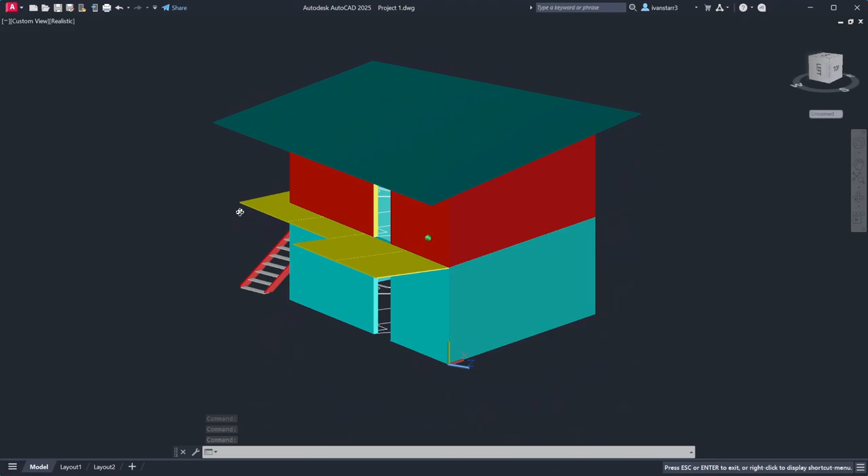Now this building here is one I modeled for a friend. He's got a hotel, and this is a new building. This is the shell of it. It's got non-trivial architecture because it's going to go into a cramped little space he's got on his property. It's going to turn out really nice. It's basically already at this stage.

But for right now, I'm going to show you this program that's going to automate the drawing of windows, and I call it Architectural Windows. This is the 18th version.

As you can see, it is not a trivial program. This isn't all of it, this is the main bit. It references a lot of functions in my support functions file - more on that later. It's a program that uses dictionaries and 3D programming, using matrices and vectors, to do what I'm about to show you.

Let's get back to it - first you got to load this. You should always load your program before you try to use it. So that just loaded it right there. Control Alt E, that's how you load it very easily. You could go up here to Debug, or Project, there's a load command somewhere, but it doesn't matter - you press Control Alt E to load it.

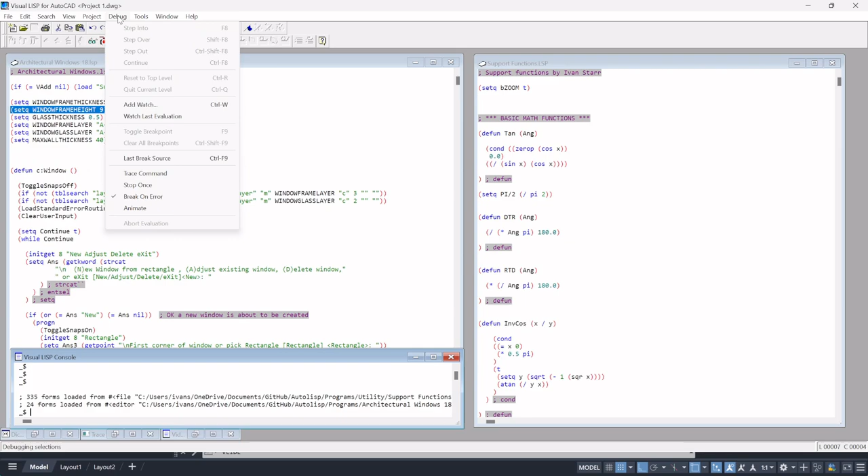We'll go back to AutoCAD - you can do that by typing Alt W A as a shortcut. And here we are in AutoCAD. I think the best way to use this program is to draw some rectangles on these 3D solids where you want the windows, and those rectangles are just going to turn into windows semi-miraculously.

So let's go around. I got my dynamic UCS button on, and that's going to allow me to draw on the faces of these 3D solids representing walls.

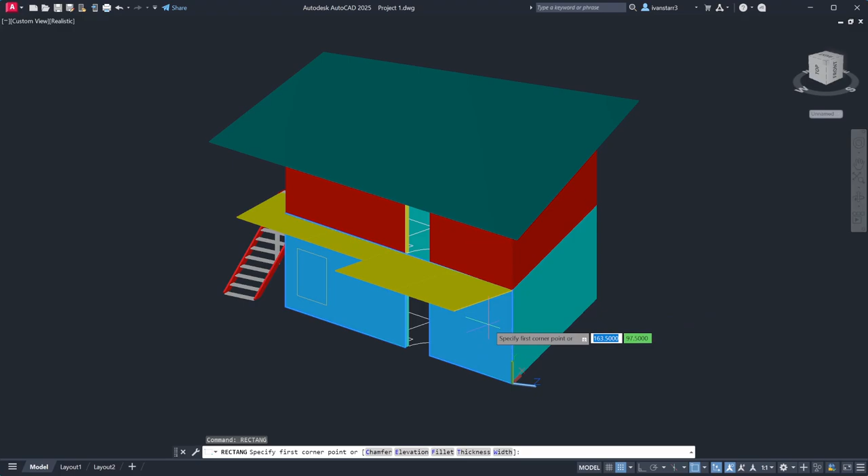So here I go, issue the rect command - rectang - and I'll just draw a few rectangles here because I got the dynamic UCS feature enabled. I can go anywhere, as you can see the cursor is switching around depending on what side of what 3D solid I'm about to draw on. I'll issue that rect command again, and as you can see, the blue line on the cursor, which represents the z-axis, always sticks out at right angles to the surface.

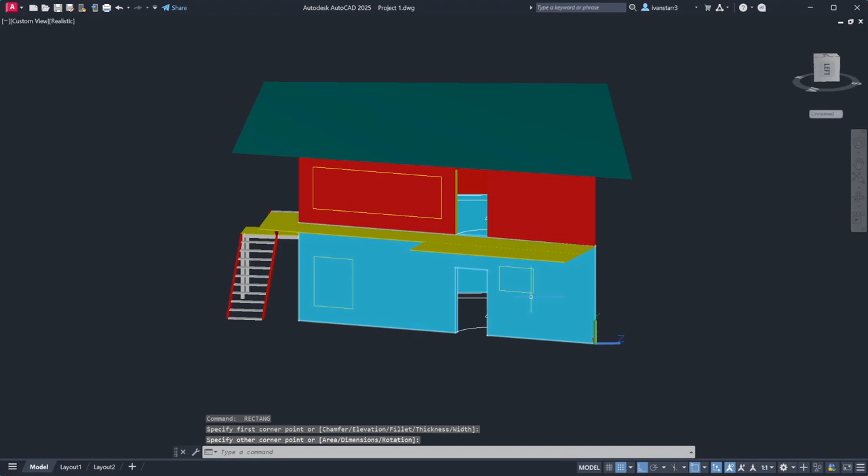So I'm just going to go around and randomly draw some rectangles. Maybe you want a big window over here, maybe a couple small windows over here, and we'll put a big giant one on this side as well.

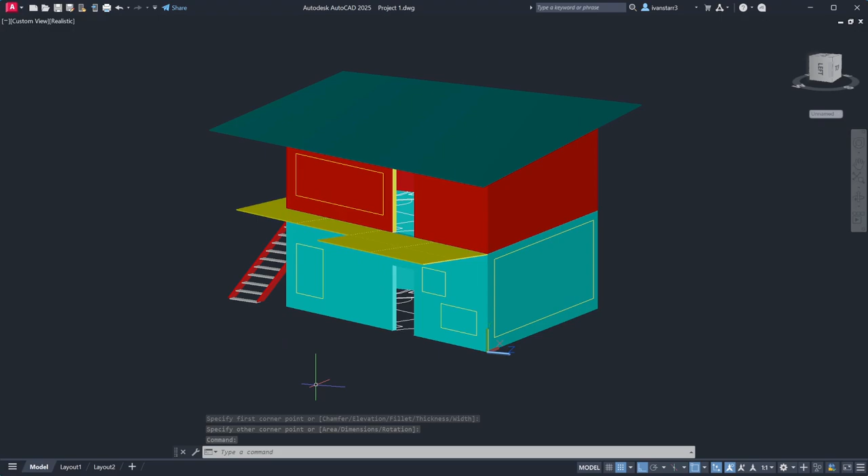I hope that beam can support the upper floor. I'm sure it will before the job is finished. But in any case, now we've got these rectangles where we want windows. So what do you do now? Well, you issue the window command, of course.

Window command, new rectangle. You want the polyline, and look, there you go. One window.

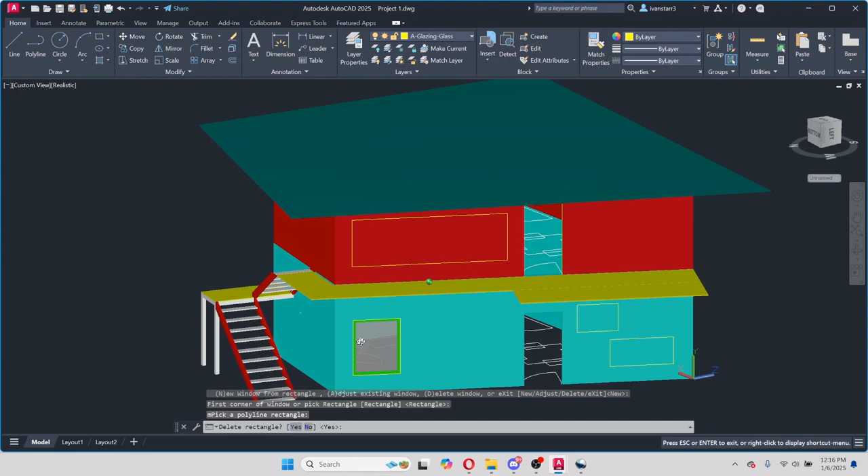Delete the rectangle. Another new one. Use this rectangle here. And another. And another. Another. And this big one right here.

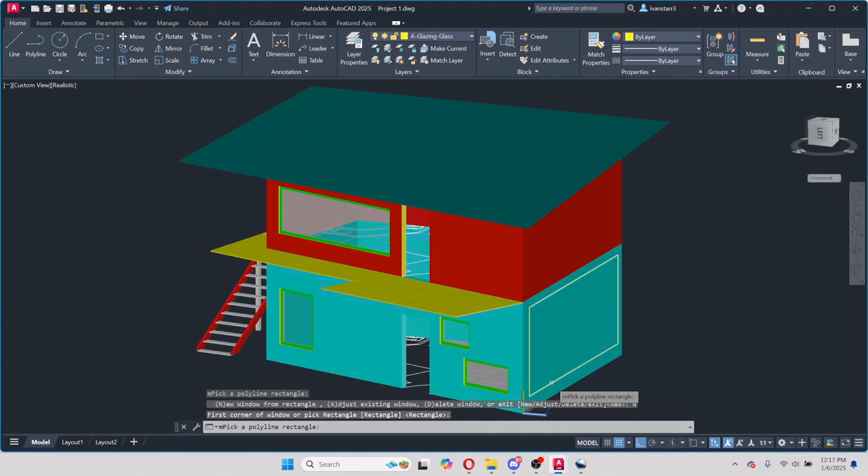Ooh, ooh. Oops, let me try that again. There we are. So that made 5 windows pretty darn quickly.

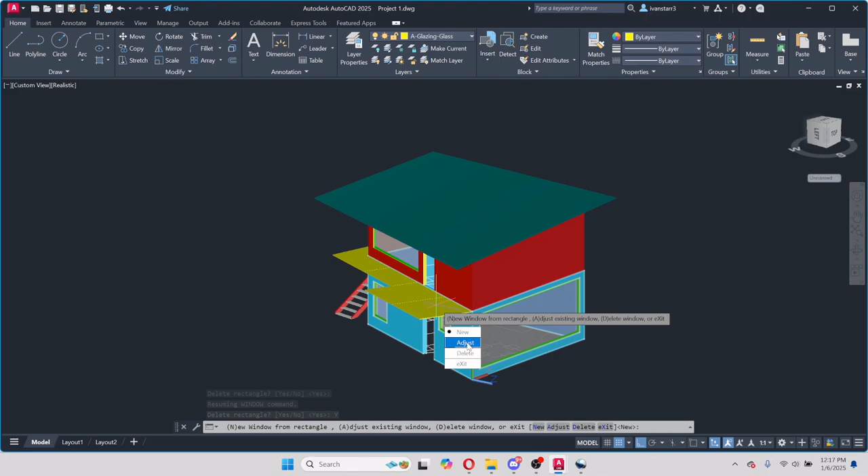I'll delete that rectangle as well. Now imagine if one wasn't in the right place, you can just adjust the corners very easily. I'll say this one right here. And imagine we wanted to move this back a little bit. We could click right here.

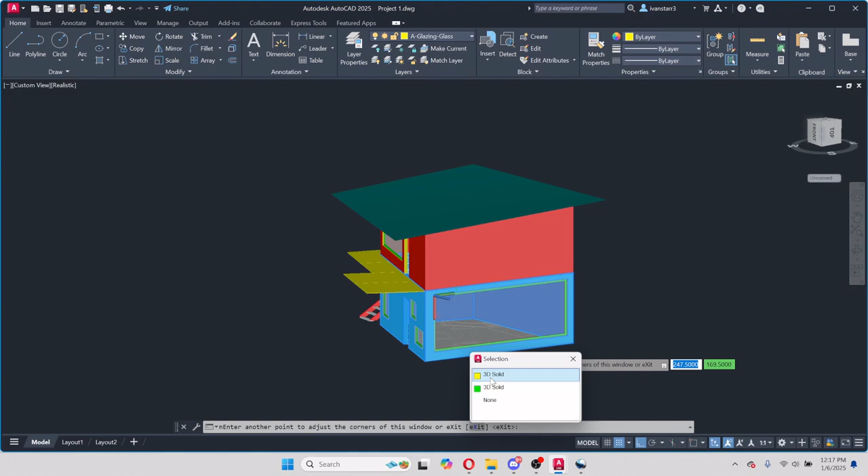Ooh, which 3D solid was that? Hold on. Let's see, I'll remove that breakpoint by pressing F9. And I'll continue on by clicking Control F8. Sure enough, you can see that window has changed its lower right hand corner position.

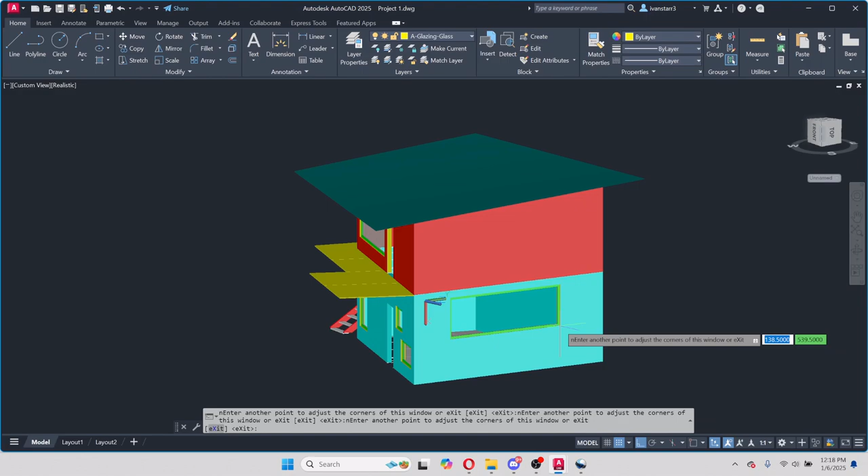We'll do that again, say right here. Or we can move this corner by clicking over here. So that feature works out pretty nicely.

And of course, sometimes you might have to delete a window, so I included that function. First I'll exit out of this adjusting command, and I'll choose delete. And I will click this window right here. I assume it's going to be the first one. Got to be a little bit careful, yeah.

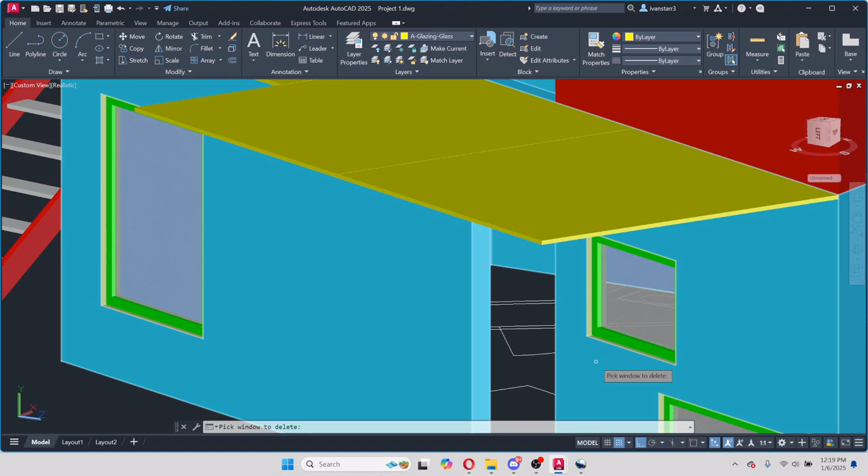And I'll click. Actually, it's better if you choose the frame, because that is not ambiguous. And we'll delete this one just for good measure. Also, you can see the color is not ambiguous here.

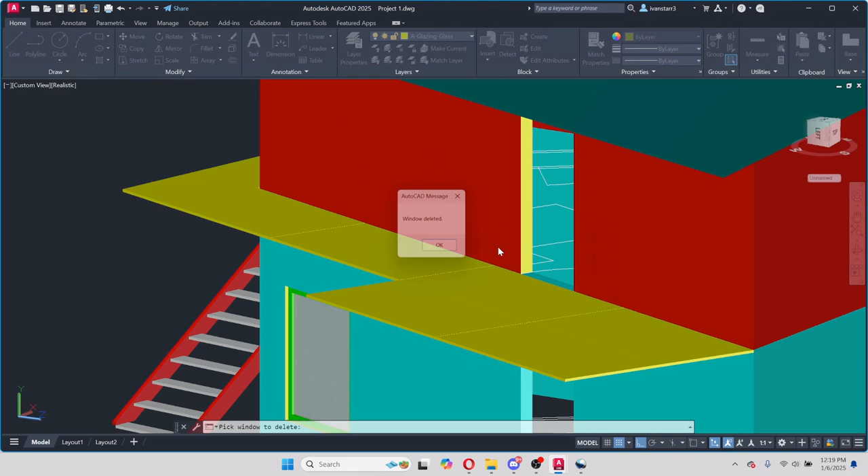And so that's a pretty brief rundown on how the command works. Oh, hold on, hold on. I'll show you the other way to enter a new window. And that is to use the current user coordinate system right here. That basically allows you to draw the rectangle during the command.

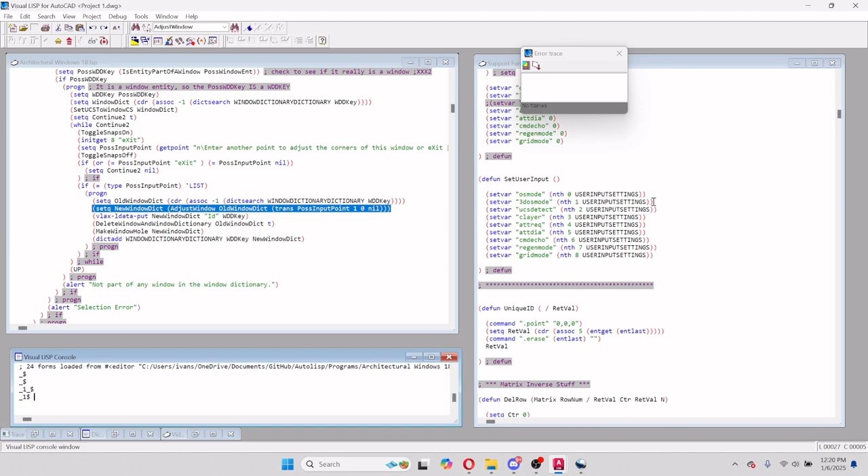And we got an error. Let's see what the error is. Press Control Shift R. And oh, it's an error break. Too many arguments. Oh, I'll call the point source.

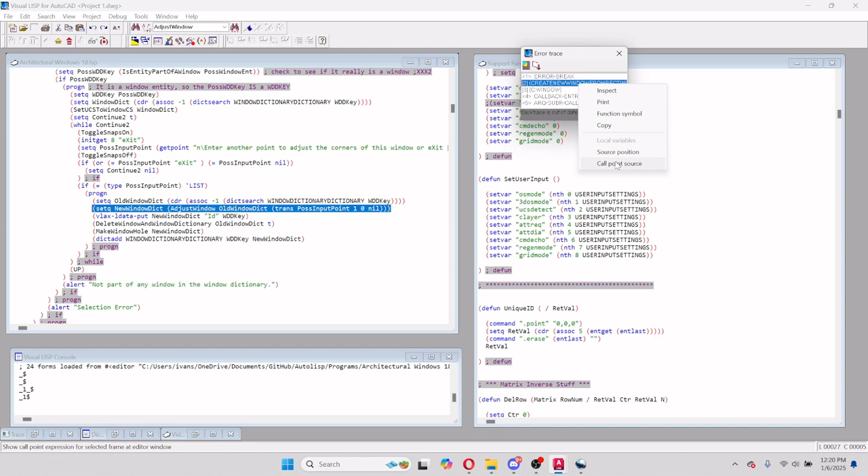I didn't try this command out since I last changed the program, so let's go take a look. Let's put a breakpoint here. And then we'll go look at the definition, because I did change this function recently. Right click, go to symbol service, click this here, and that brings up the definition.

So now I reduced the number of parameters to just one, just the rectangle. So let's go back to, where was that breakpoint? Where did we put that breakpoint?

That was in the main function, under create, new, and... where did it go? There it is. Okay.

And it does not need that. That's right, that was from a previous version. So I'll delete that right there. And now it should run. I'll save it, Control S.

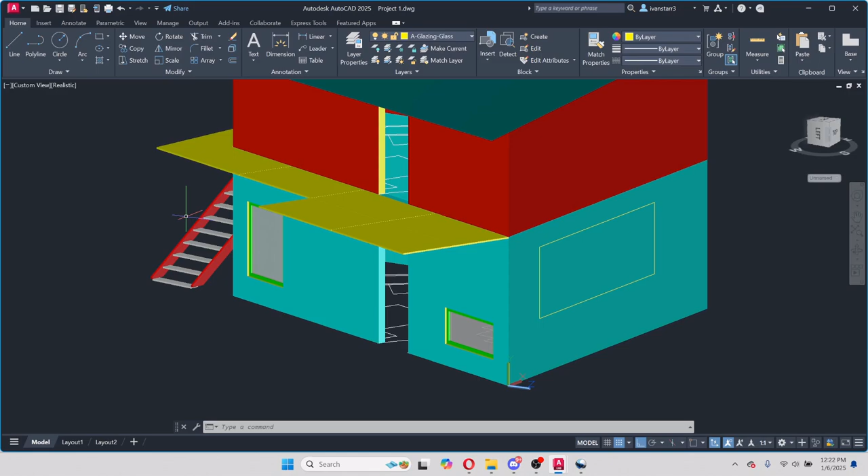I will load it with Control Alt E. I'll press Control R to reset. And we should go back to AutoCAD. Here we go. So let's try that again.

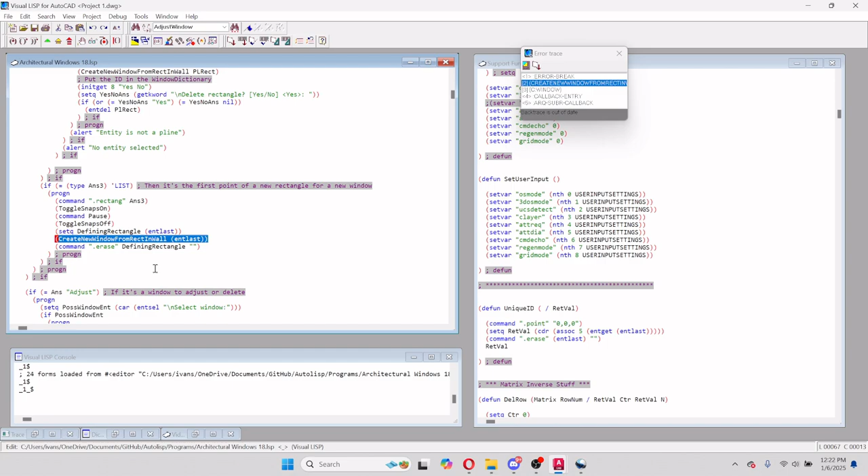Issue the window command, new. And I'll make a little window down here. That's the breakpoint. I'll hit Control F8 to continue on. And sure enough, there it's working now. So there you saw a little bit of some debug action for you.

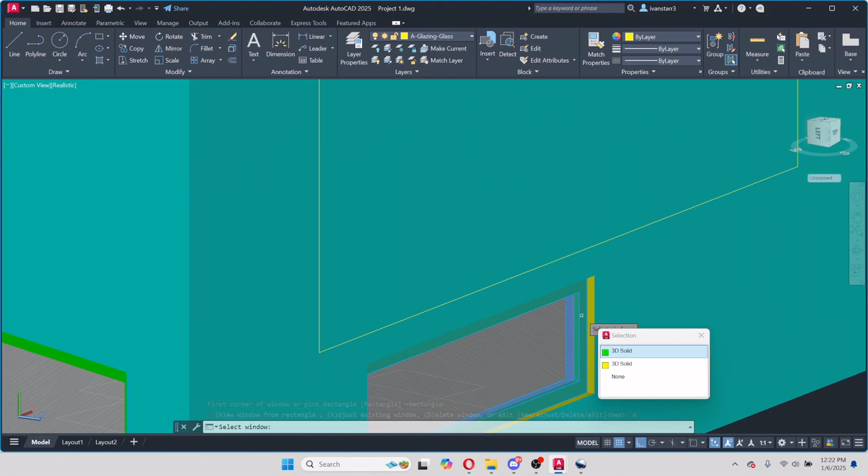And we're back at the main menu. I'll adjust that window just to make sure everything's working correctly. It's the green 3D solid we want. And now I will click say over here. And sure enough, it's working correctly.

All right, so there you saw me clear up a bug in the Visual LISP IDE, and you saw me demonstrating the program. I think that's it for this lesson. I believe. First, I'll exit out of the command, or exit out of that subcommand. I'll exit out of the main loop of the command.

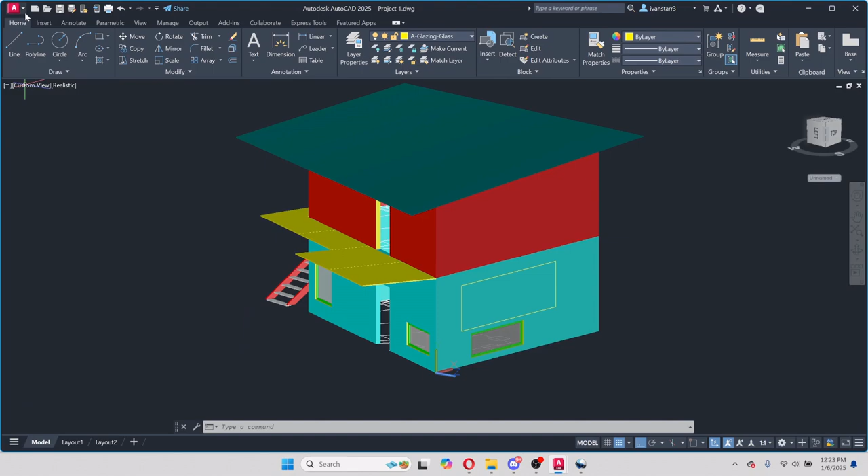And let me see, did I say I would do anything else in this particular video? No, I think that's it. Program overview, yeah, that was a program overview. All right, so that's it for this particular video. In the next one, I will explain how it works a little bit and talk about my preferred programming style.